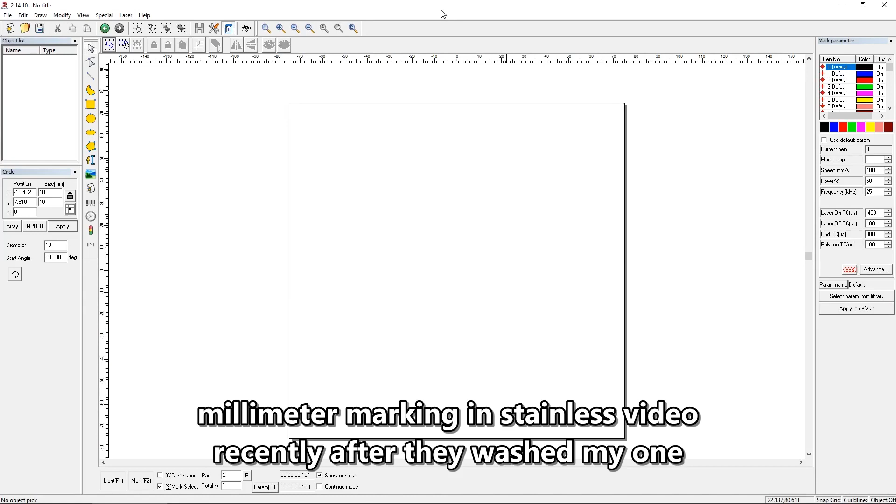Let's take a look at a setting in EZCAD that someone brought to my attention recently after they watched my 1mm marking stainless video, when I tried to actually cut through stainless and it didn't work out so well. This setting is called Wobble. It's available in the pen parameters, and let's demonstrate it and also look at the description of it in the EZCAD manual so we can get an idea of what it does and what the purpose is.

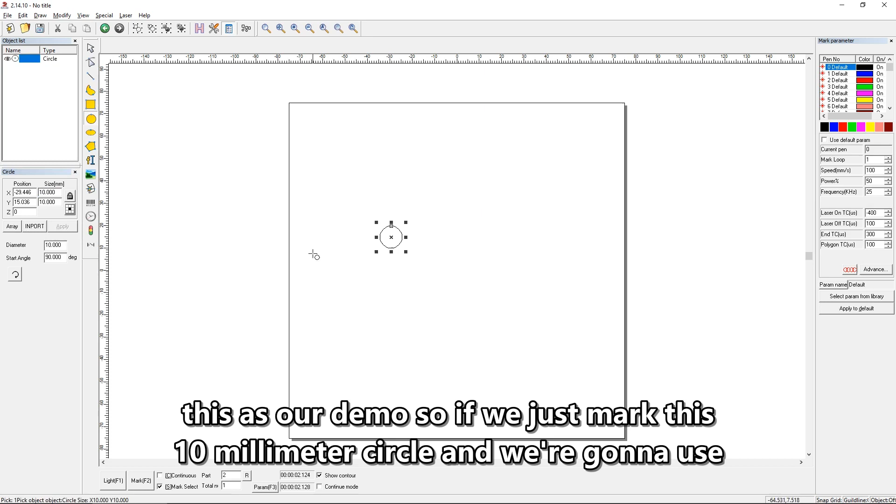First I'm going to draw a little circle here. I'm going to make this a 10mm circle, and we're going to use this as our demo. If we just mark this as it sits, it would just be a single line.

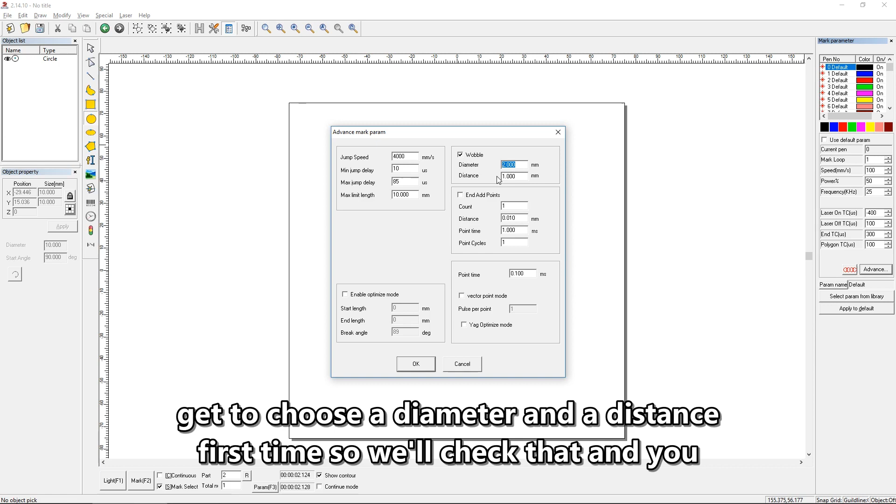Now, if we instead went to our pen parameters over here, saw that we have pen 0 selected, and we made sure the use default parameters button is unchecked, went to the advanced button, and we saw in the upper right corner there's a section that says Wobble. I've got it checked right now - it'll probably be unchecked when you go into it for the first time. So we'll check that, and you get to choose a diameter and a distance for this setting called Wobble.

So what it's going to do is essentially mark this 10mm circle. Notice there's no hatching, it's just a line right now. But it's going to do it in a spiral pattern. So it's going to make the diameter of the spiral at 2mm, and it'll make the distance between each center of the spiral at 1mm.

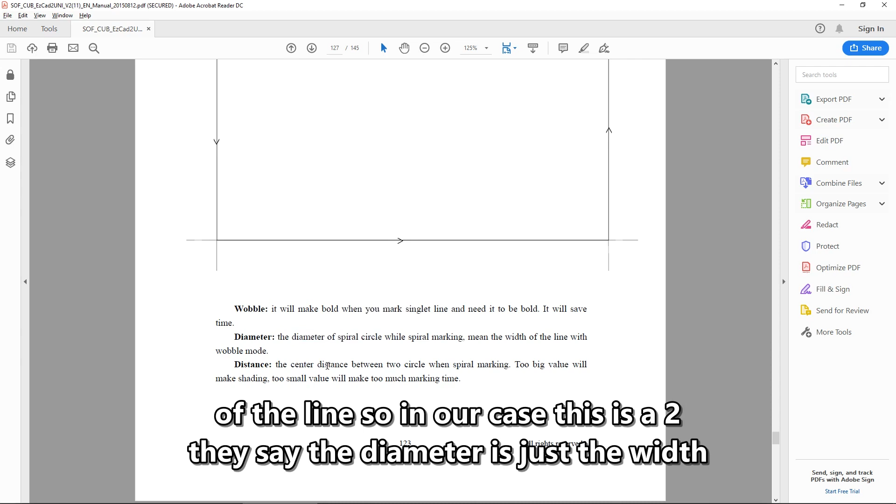And we can look at the manual, and you can see how they describe it. They essentially say it's used to make a single line bold. And they say the diameter is just the width of the line. So in our case, this is a 2mm diameter certain spiral, let's say, and it's going to mark up the center of this line.

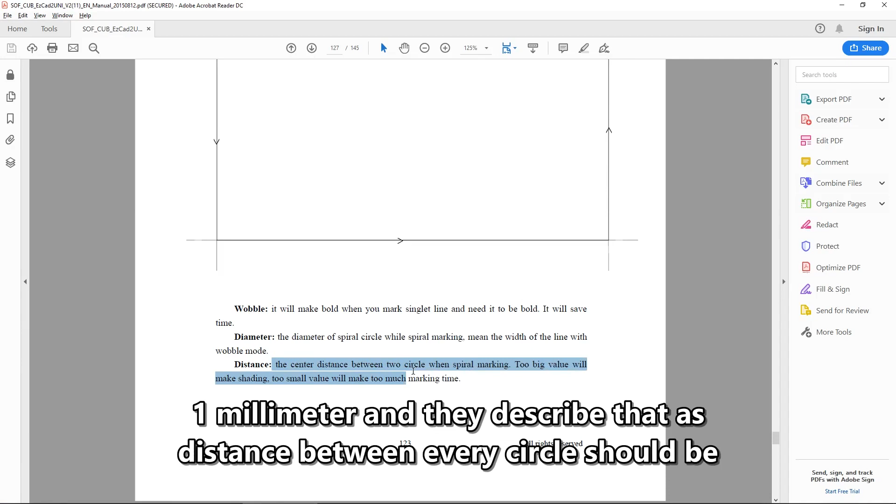So effectively our line is now going to be 12mm, the outer part of the circle we mark, and the inner is going to be 8mm. And the distance between every circle should be 1mm. They describe the effect as well: if your value is too large, you'll have shading. If the value is too small, it's going to be way too much marking time, essentially like a tight hatch.

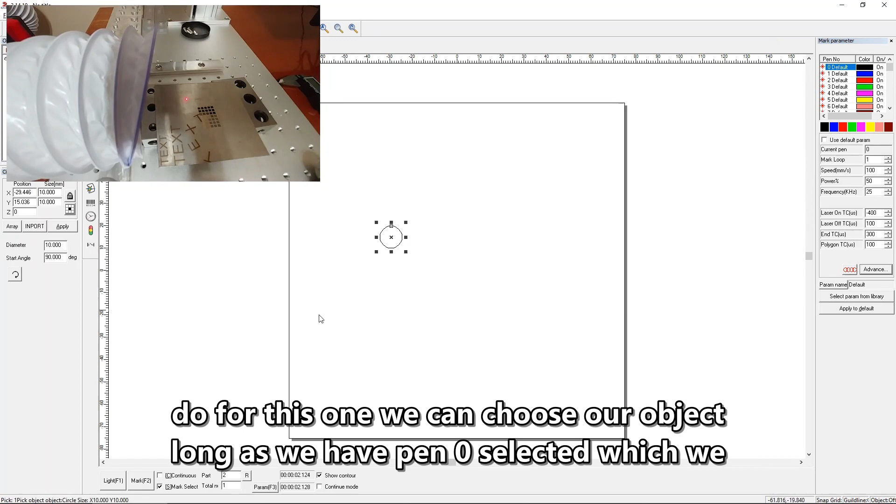So let's actually do this. We're going to do this at 2mm, and we'll leave the distance at 1mm. We'll say OK. And as long as we have pen 0 selected, which we do for this one, we can choose our object, we will light it up. This is the same 1mm piece of stainless that I was using previously. So let's go - this is just going to mark once. We're at 50% power, 100mm speed to keep it slow so we can actually see it, and 25 kHz frequency.

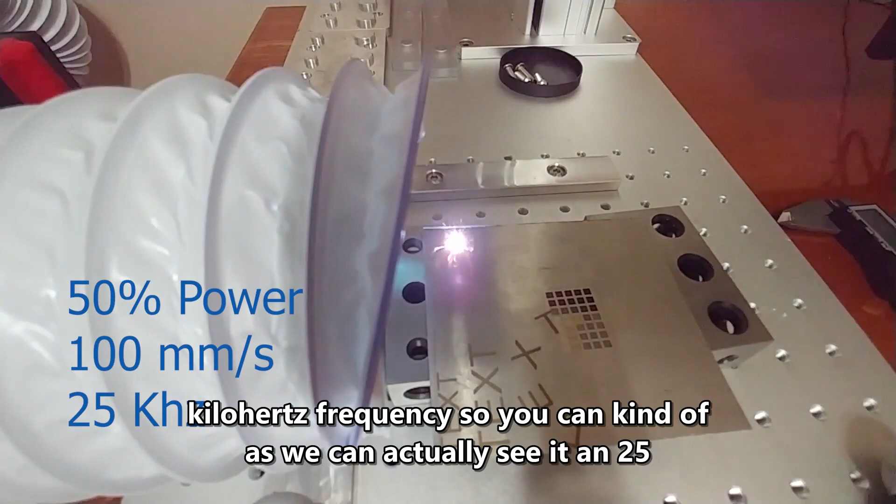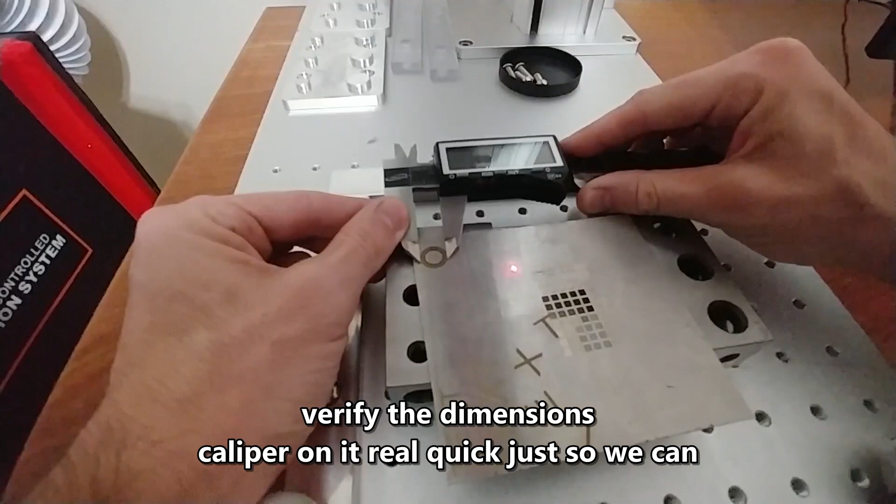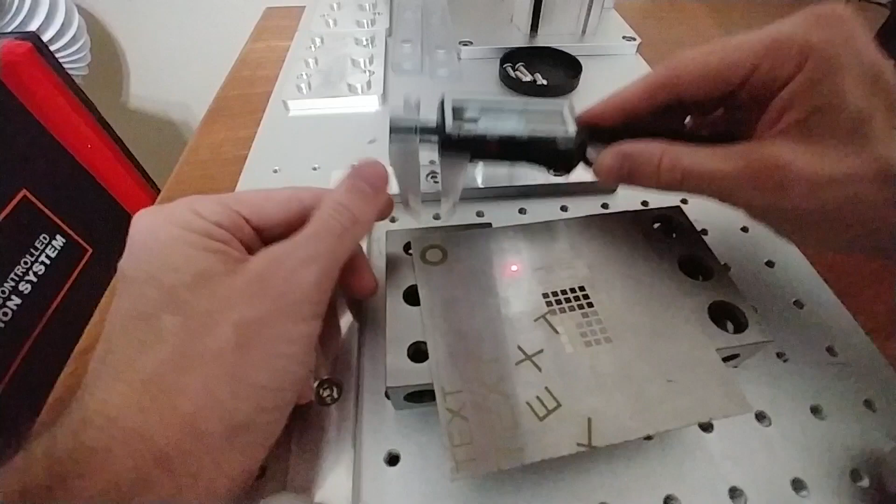So you can kind of see what that did. It's kind of a dense pattern, but let's put a caliper on it real quick just so we can verify the dimensions. I'd say the outside is 12, the inside is about 8. So it looks pretty consistent with what was expected.

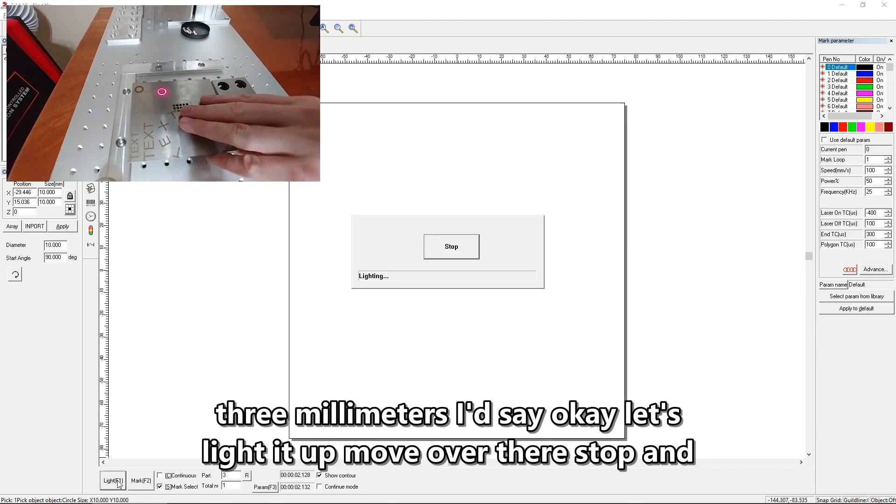Just for fun, let's change the settings. Just to see what the effect would look like if we made this a lot larger, let's make the diameter of the circle 3mm, but now let's make our distance also 3mm. Let's say OK, let's light it up. Move over there, stop, and mark. So you can see we essentially have a much more spread out spiral.

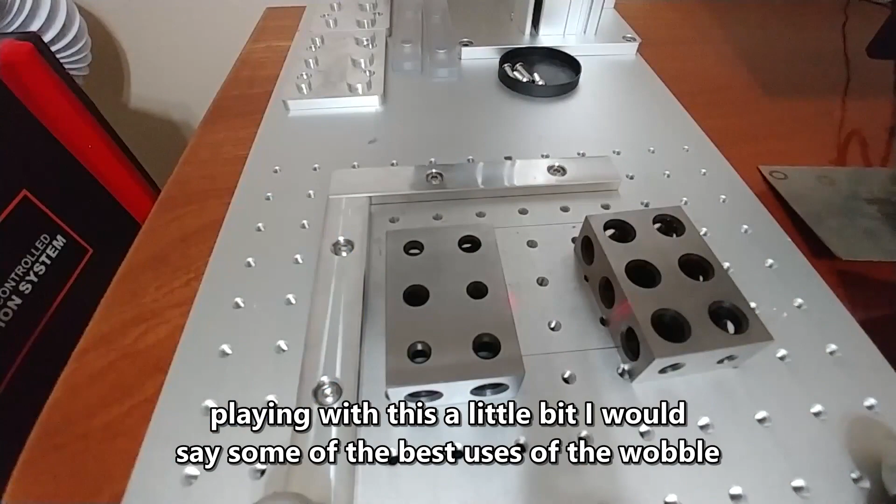So after playing with this a little bit, I would say some of the best uses of the Wobble setting would be to add thickness to an outline. If you just have a line and you don't want any hatching, the only downside is you have to remember that you're going to mark your diameter around that outline, so you're going to have a little bit of distance on either side of it. You can also get better coverage of an area - instead of just hatch, you can add a wobble to the hatch, and then you can get through an object a little bit easier. And lastly, you can use this for interesting designs.

So I was unaware of this setting until someone brought it to my attention, so I'm assuming other people might benefit from knowing about it too. And if you have any questions or comments, feel free to let me know.